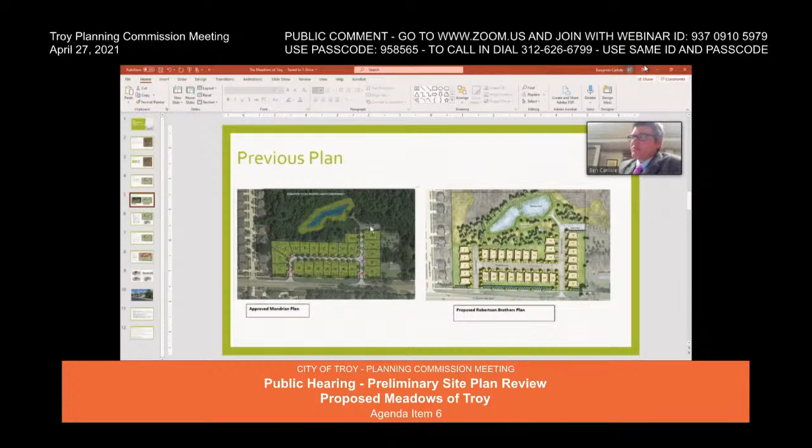We do note that the site plan complies with all the R1D setback requirements with regards to cluster, except the side yard setback deviation, and we discussed that at length at the last meeting.

Units 1 through 5 are providing a 10-foot building separation rather than the required 15 feet, seeking a 5-foot deviation. Units 6 through 12, 16 through 22, and 23 through 25 are providing an 11-foot separation, a 4-foot deviation. Units 13 through 15 and 25 through 31 are providing a 12-foot building separation rather than 15 feet.

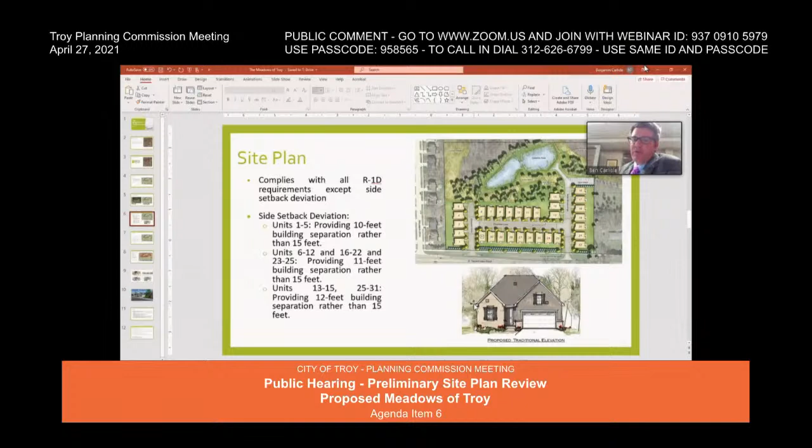In discussions with the applicant, from a staff standpoint we feel comfortable with the deviation as requested because the proposed houses are a 1-story product, as you can see by the pitch of the roof. The massing is greatly reduced as you go up in height, so the need for the 15-foot separation is relieved by the proposed product from the applicant.

We do note that the applicant is providing a proposed housing product that's desired in the community, one that Director Savidant and I push a lot when we meet with developers - a 1-story product with a first floor master bedroom and bathroom. We don't have very many of these in Troy, and this will be one of the larger developments with this type of housing product.

In addition, the applicant is constructing a 13-space gravel parking lot that'll be open to the public. There will be an easement across this road to access it, so that will be open to the public to use as a trailhead parking area.

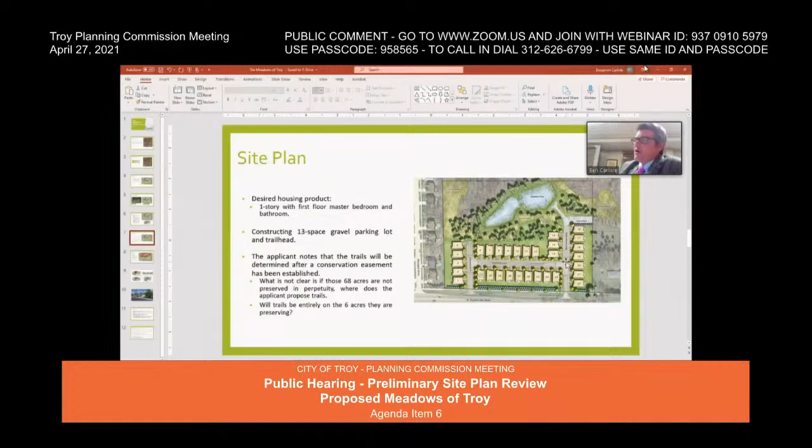The applicant notes that the trails will be determined after the actual location of the trails within the school district property is determined, based on a conservation easement that will be established. What is not clear, and something we've asked about, is regarding those 68 acres at the school district, but in conversations with the school district, their plan is to keep that area as open space in perpetuity.

With regards to open space itself, the area of open space is outlined in red. It includes 42% if you exclude the detention pond, and 52% of the total area if you include the pond. Within the open space designation, there is a wetland as well as woodlands that they are preserving.

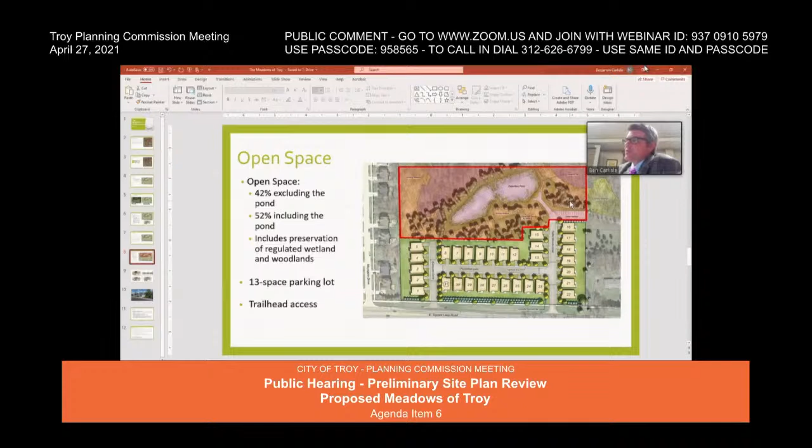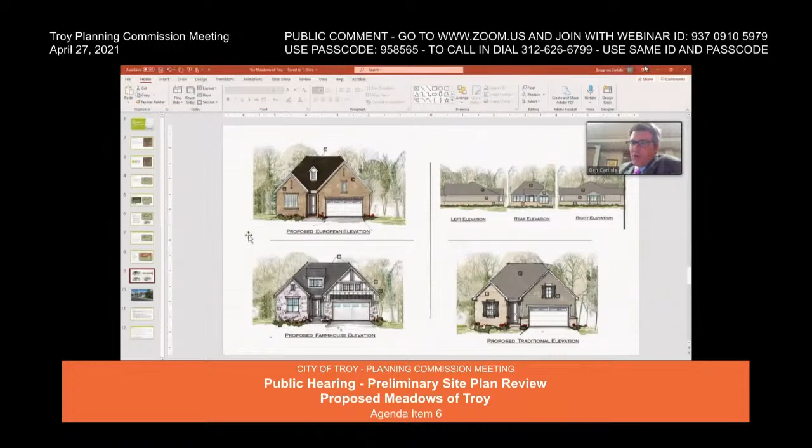Again, I noted the 13-space parking lot and the trailhead access. The product they're showing includes 3 different front elevations, and you can see the left, rear, and right elevations in the upper right-hand corner. The applicant will have to vary these housing forms as they go through the building permit review process.

So in summary, in exchange for approval to seek 6 additional units, the applicant is providing the following benefits: preserving over 30% of the site as open space, which allows for preservation of natural resources and site amenity; a private road which allows additional buffer than a public road would; an open space collar around the perimeter to adjacent properties; long-term protection and preservation of natural features; preservation of numerous trees and a regulated wetland; a site that can be adequately served by public services; a public parking lot and trailhead; and lastly, a housing product with a first floor master bedroom and bath desired by the community. We find that the site provides many benefits that would not be achievable without a cluster development.

We are recommending that the Planning Commission recommend approval of the cluster plan, provided that the applicant provide a new assessment or extension from EGLE, provide a maintenance agreement for the parking lot, and provide an easement over Turtle Woods for access to that parking lot.

So, Mr. Chair, I'm open for any questions from the Planning Commission.

Any questions for Mr. Carlisle? Go ahead, Mr. Lambert. Thank you, Mr. Chairman. Mr. Carlisle, I was wondering if you have access that you can put up on the screen to show what the alternate plan would be, if for some reason both Planning Commission and City Council were to turn down this proposed cluster plan, because I think a lot of people don't realize that if we turn it down, they could still build that property according to the original plan meeting the R1D. Yeah, I have it here, just give me one second. Sure, thank you.

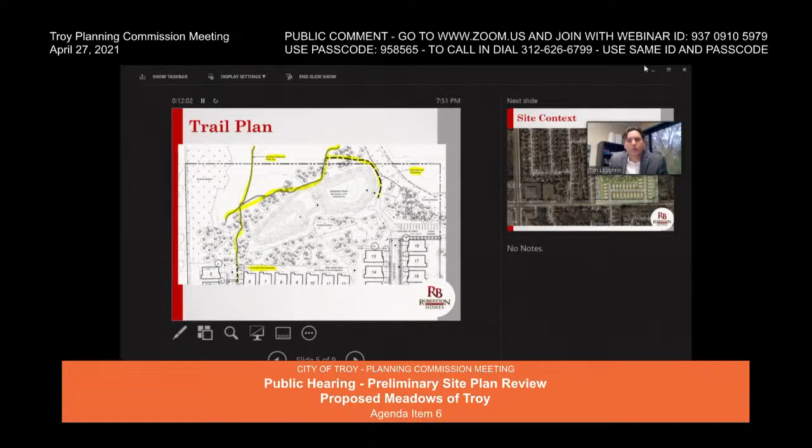Just quickly on the trail plan, there are existing trails already, and we are proposing to connect to them. This would be a new trail, and then this little connection here. We've looked at all this and feel these are the best connections, which will be for the public, particularly with this gravel trailhead.

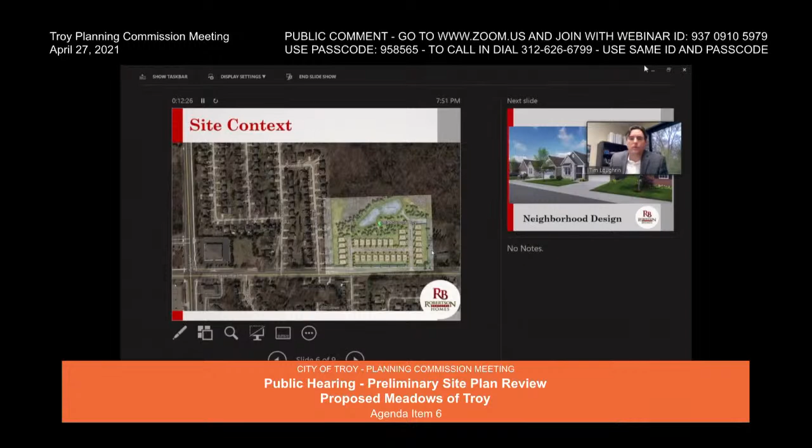From a site context, this doesn't show the entire 80 acres, but it does show what surrounds us. We have traditional single-family neighborhoods at 2 to 3 units per acre, which is what you see in the surrounding areas. This product would be very cohesive with that, and it's a great transitional use with all the open space we're providing.

I want to show this slide too, Ben did show this as well. This shows our architecture and elevations, and the typical building separation. If these were two-story homes, you'd have a much greater effect, and that 10 to 12-foot separation would feel a lot closer than it is. These are very open, ranch-style, one-story homes.

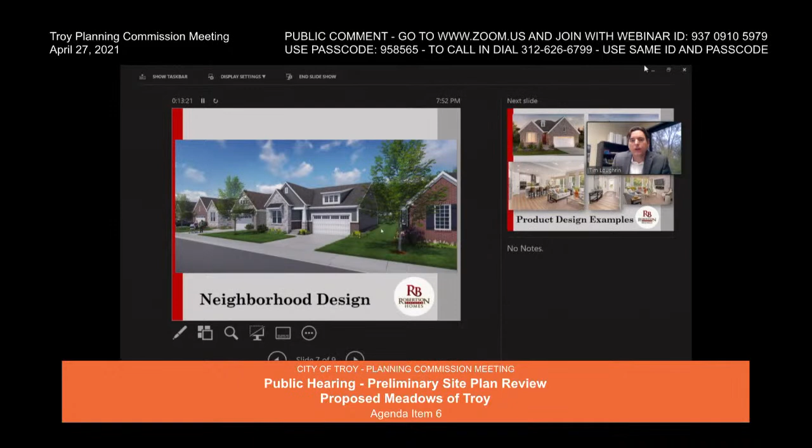This is the side of one of the units, you can see there are no windows there. The other side has a bay window for the den, so there are windows here and none there. You have zero concern with one home looking into another. That's just how these buyers prefer it.

From a product design standpoint, there are very rich details and rich materials. You can see it in person right down the street—Brewster and Walton is probably the nearest community we're building. It's brick, stone, Hardie board, very rich detail. And then the interiors, our base models are great, and we've seen a lot of people optioning these up in our design gallery in Bloomfield.

So just moving on, hopefully I've answered some of your questions. We feel this is the right use, the right place at the right time, and the right product. We hear a lot of people looking for this specific type of home, and we can provide it for them here while saving more open space than I ever have in my career. This would be a catalyst for preserving a lot of open space here.

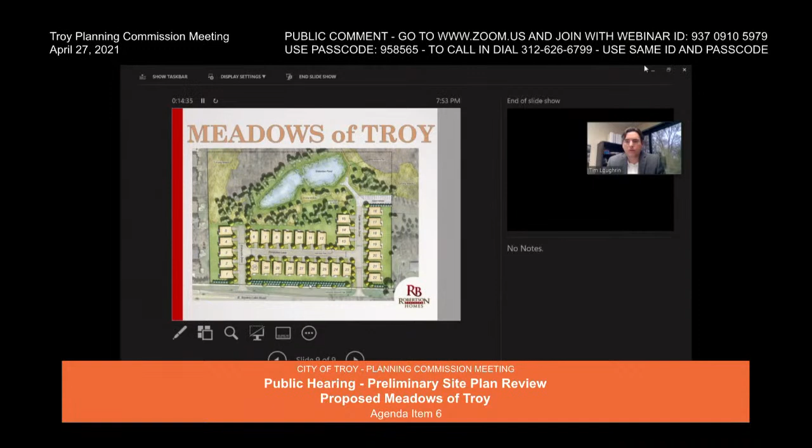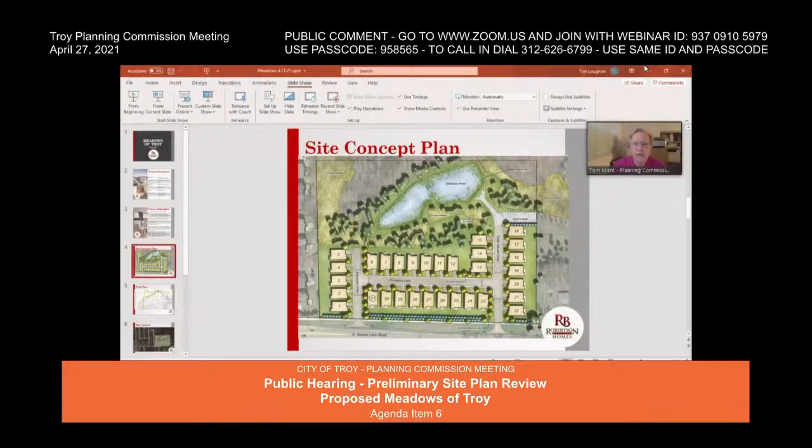I'd like to get a full screen here if possible, but we may want to leave the slides up if you have questions specific to a slide. Since I can't see everyone unless I change my view—might just be me. I don't think I can see all the commissioners and the presentation at the same time, unless we have an IT person who can explain how to do that. Good, so if you look at where you see yourself, the upper right corner, you can flip the screen if the presentation's up, so you can make one bigger than the other. There should be an option at the top near the panelists, maybe above Mr. Hutson. If you hover over it on the right side, it should say 'swap shared screen with video.'

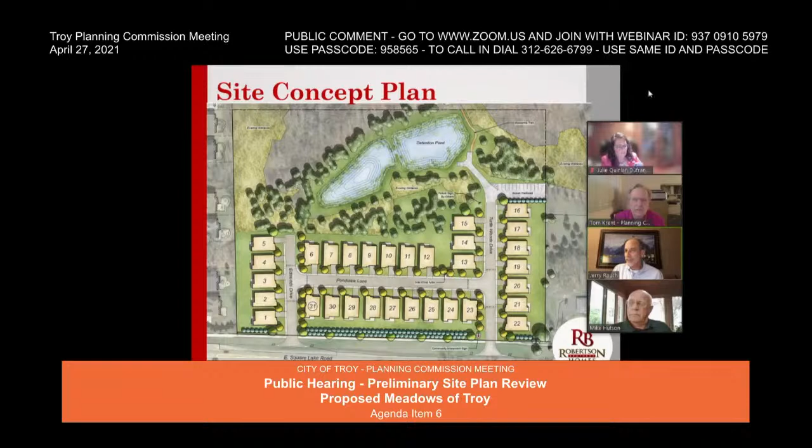Mr. Rauch: I had a question regarding the side yard setbacks of the petitioner as well. At our last meeting, you gave the example of your Rochester Hills development. I looked at the plans for that development, and the side yards on all those homes are 20 feet. That development has, by comparison, 7 acres of land being developed, while in this proposal you have about 5.7 acres being developed, leaving aside the area for trailhead and wetlands. So you could have fit many more houses in that development, or at least asked for variances to do so. Is that true? Am I reading that right?

I'd have to look at the plans, I don't know off the top of my head. From my standpoint, we did not have open space that needed to be saved there. So we looked at this site differently. This site is special because it has the open space to preserve. That other site was basically more of a box we had to work with, and a lot of it is how you fit it in — it's site planning, a whole process. But that site did not have significant natural open space to save; it didn't have really any natural open space, it was a cleared lot. So we had different existing conditions with that property.

I'll leave it at that, Mr. Chairman. I'll address mine later. Mr. Clark has his hand up.

On the Rochester Hills project, we would have asked for a 15 or 10-foot setback, but we would not have gained any more units. There wasn't a run of enough houses where changing that setback would have added or subtracted a unit — it's all about the geometry of the number of houses along a single line. We would have tried to reduce it because we knew it protected the views from the windows, but it just would not have added an additional house in Rochester had we gone to a smaller setback. That was also under a different zoning district and category, and it was not a cluster development, which encourages this type of flexibility.

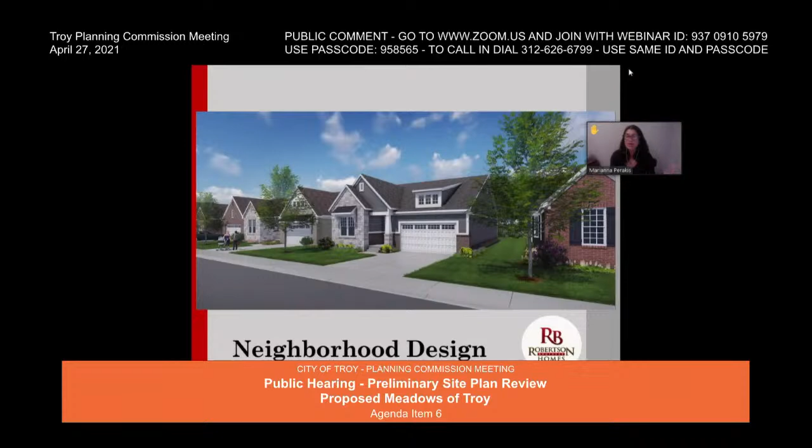On the flip side, when one of my fellow commissioners asked what happens if we don't recommend this and they use the entire 12 acres and put houses on it, I did not prefer that, of course. But I guess I'm struggling because I feel like there are ways, you said there's plenty of room, that you're leaving more open space than what's required in the cluster.

So I can't figure out why you can't just spread things out and move everything up. Why that gravel trailhead can't move a little bit up or be reconfigured in a way that allows for a little bit of widening to meet that side deviation.

You made the comment that people even prefer the aesthetic of having the houses close together, and a survey was done where people said yes, we want them 10 feet. I think it's a quality of life issue. Nobody's pretending anyone's hanging out in their side yard, but to me it's just the appearance of what it looks like.

Yeah, if I could speak to that, and Jim might be able to chime in as well. We obviously did buy for that setback, but we've been a practitioner doing this for over 75 years. We've built a lot of these type of communities. In fact, we've done more than anybody else in the entire Southeast Michigan market.

So I think it's safe to say we do know our market, we do know our buyer. We're going to invest many millions of dollars into this project. If we felt there was an issue whatsoever, we would not be showing this project. I think it speaks volumes that we are as bullish as we are on this site plan, knowing the buyer as we do, and that we will put our money where our mouth is. This is something that we feel is not an issue. We feel it creates more of a cohesive development.

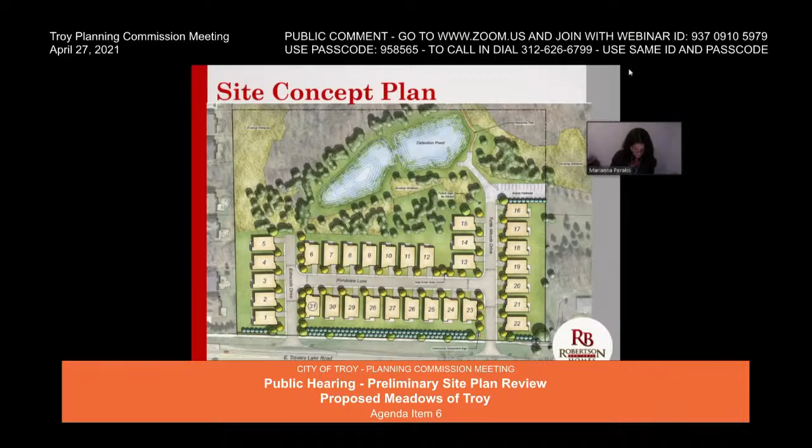I'm just going to do them in the order in which I have them here, I guess. Okay, so this was sent in from Laurie Shaw. First, I want to say that after watching the April 13th meeting on YouTube, I was very pleased with the representation of our Troy board members. Even though I didn't attend the meeting, I really appreciated all the great questions that the board members asked in regards to the Meadows of Troy development. I think they have our voices. At least I nodded my head several times and said to myself, great question. So thank you for all the great representation.

In the April 13th meeting, the Robertson Brothers representative mentioned that a homeowners association would maintain the landscaping, and I'm concerned with pesticide and herbicide usage that is commonly used throughout the lawns in Troy. Will these lawns be maintained with pesticides and herbicides? I'm concerned that pesticide and herbicide use will inevitably run off into the wetlands behind these houses and cause great harm to invertebrates, aquatic vertebrates, and other animals. From the April 13th meeting, a low point was discussed behind house number 5, which would make runoff into the undeveloped land easy to occur. Or just by using these potentially toxic substances, they can get into the soil in the undeveloped land and cause harm to the above as stated.

I've seen this happen around Troy. For example, I've seen runoff from a residence, pesticide and herbicide use on a lawn near the Sturgis Drain into a conserved wetland from the houses at the end of Tallman Drive in Troy, east of Livernois, north of Wattles. Also, pesticides are used in the lawns of homes on River Chase Drive in Troy that back up to the Rouge River. When it rains, these chemicals have to be seeping into the river. I know the state of Michigan doesn't regulate these pesticides and herbicides that lawn care companies use, but I think any use of these is a huge mistake to our environment. There has to be a better way.

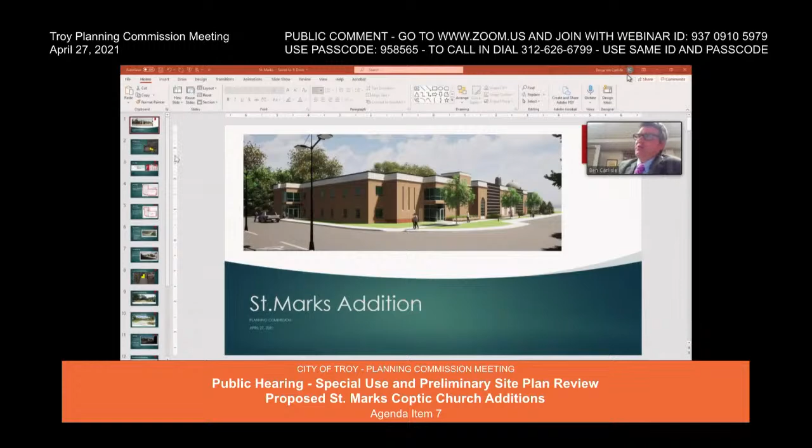Again, this is a continuation of the public hearing we had two weeks ago. The applicant is St. Mark's Church, located on the west side of Livernois, just north of Big Beaver. The addition is to an existing church at the back of the existing site, located at 3603 Livernois Road. It's zoned R1B, and the proposed addition is a place of worship, which does require a special use permit.

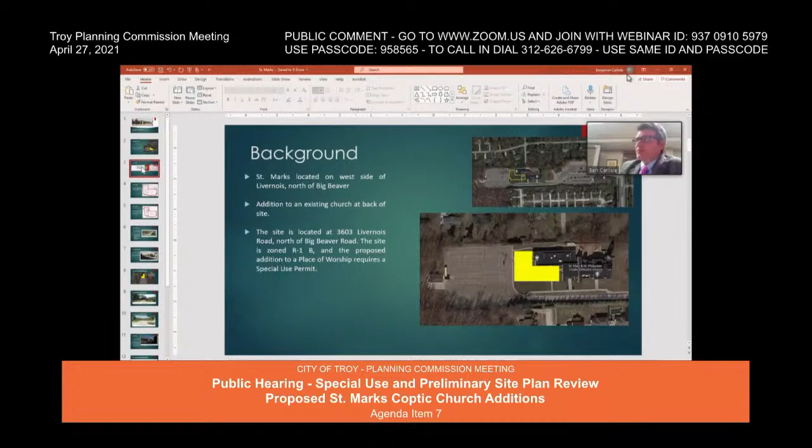The site plan is in front of you. It's a little hard to read on the screen, but the existing worship center or church is outlined in green, and the proposed addition is outlined in red. The proposed addition is a 2-story addition that includes a basketball facility as well as classrooms for Sunday school, and it complies with all the R1B zoning requirements.

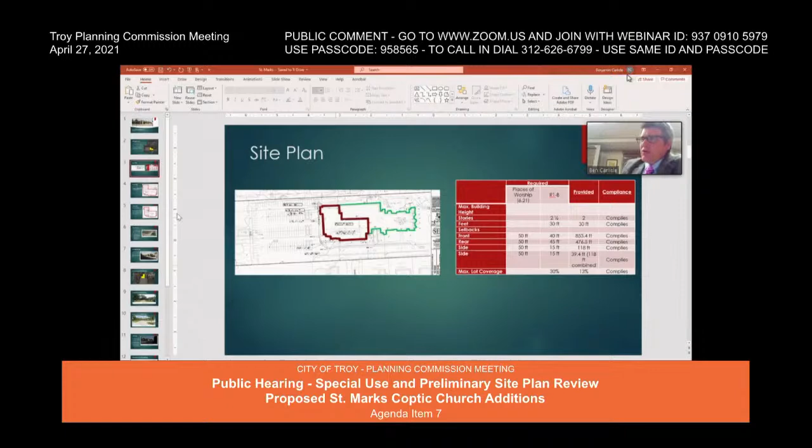The floor plan is shown in front of you. It's a 2-story addition. The first floor includes a basketball facility, 7 classrooms, a kitchen, and bleachers as part of the basketball facility. The second story includes 5 classrooms, a multi-purpose room, 2 offices, men's and women's restrooms, and a storage room. The basketball facility is 2 stories, so half of the second story is open-ended for the basketball court.

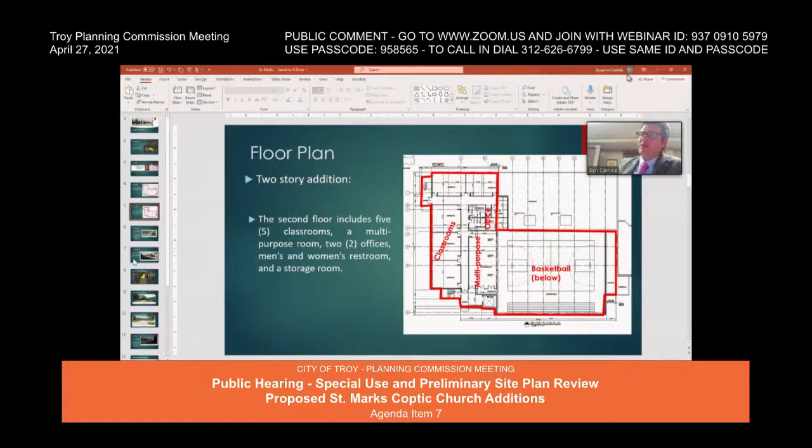In relation to the operation of the site, we did get confirmation from the applicant that the use of the basketball court would not occur at the same time as the use of the place of worship for mass. This is mostly for parking considerations, and they noted that they will not use the facilities concurrently.

In addition, we wanted to ensure the new space's times of operation, specifically with regards to noise as well as lighting upon adjacent properties. We had a lengthy discussion about that at the last planning commission meeting; they were not proposing to go late into the evening, and lighting was subdued and screened by adjacent landscaping.

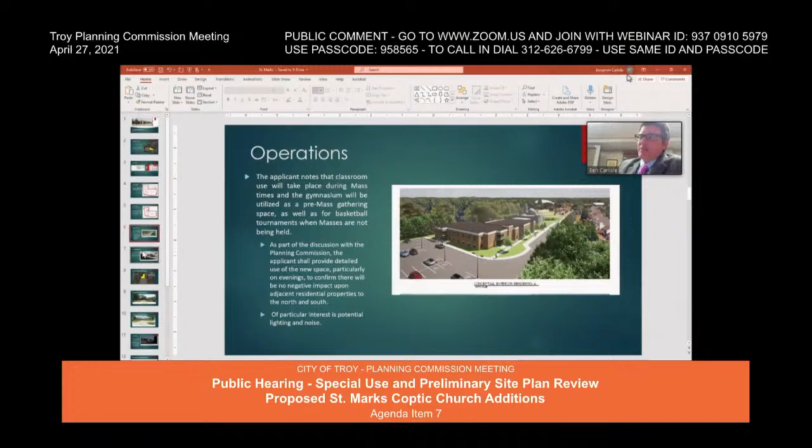The applicant has not submitted a detailed landscape plan, but according to the renderings, there is building landscaping proposed, so we are asking for a detailed landscape plan as part of the final site plan submittal.

We spent a lot of time discussing with the applicant buffering and screening. This is looking at the site from the parking lot, looking east to the facility. The facility is basically proposed as the block shown here in yellow. You'll note there's significant screening both along the northern and southern property lines that really screen this building from those adjacent properties.

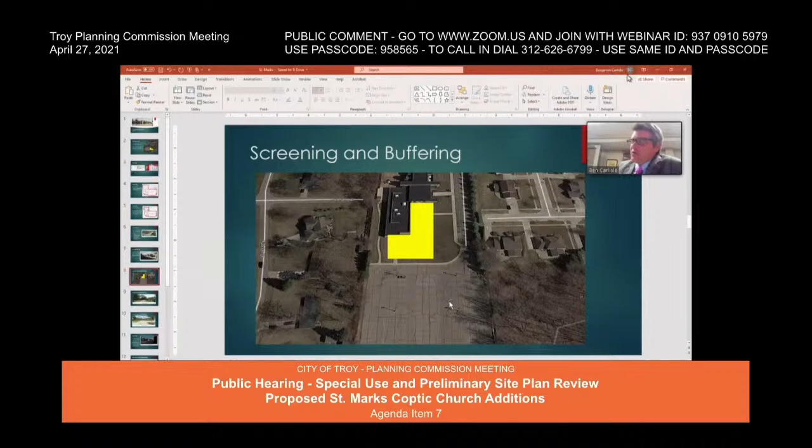With regards to lighting, the applicant is proposing 2 different lamp types, both with 2 different fixtures. Both are downward directed and meet the zoning ordinance requirements. It appears the applicant designed the building so that the highest windows are approximately 20 feet above grade, and those would be screened by the adjacent mature landscaping shown previously.

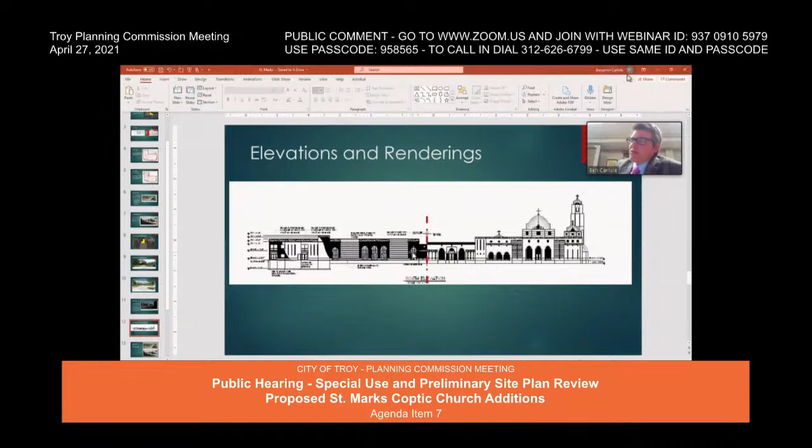This is a rendering or elevation of the building, the long side along the south elevation. The new portion of the building is on the left side of my dashed red line, and the existing facility is on the right-hand side. The applicant has tried to match architectural style consistently as well as materials.

These are some conceptual renderings. This is looking downward at the site, looking to the east. The existing facility is in the back here, kind of grayed out. The new facility is in this tannish brown brick color.

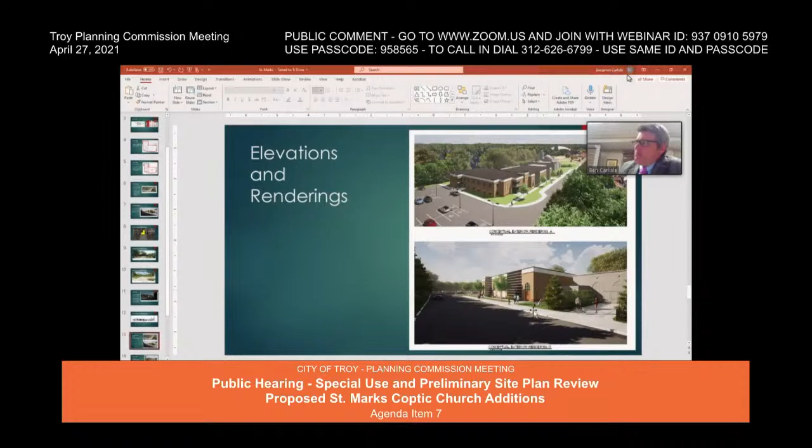This is a street level view of the elevation looking back from the site into the parking lot. This is another view of looking at the addition from the parking lot itself. And this is the rendering at night.

There are standards that the Planning Commission is to consider with regards to this facility. The applicant can explain the use of the building, particularly on evenings, won't impact adjacent properties to the north and south. We do feel it meets all the special use requirements. The primary use of the building on site continues and will remain a place of worship. There's an existing dense screening to the south and north that should screen the proposed addition.

With limitations, the co-occupancy of the main sanctuary and the new accessory facility - the new accessory should not impact existing traffic to the site out of normal operations. The addition to the existing building will not impact public services, and the accessory building does not impact the overall environment.

That being said, we are recommending the Planning Commission approve the project with the conditions that the applicant agrees there will be no concurrent use of the facilities. And lastly, the applicant provides a detailed landscape plan as part of the final site plan. Thank you.

Okay, any questions or comments for Mr. Carlisle?

Okay, we'd like the next person to speak, the applicant, to hear any further information that we maybe haven't heard from Mr. Carlisle, or other things you may want to add.

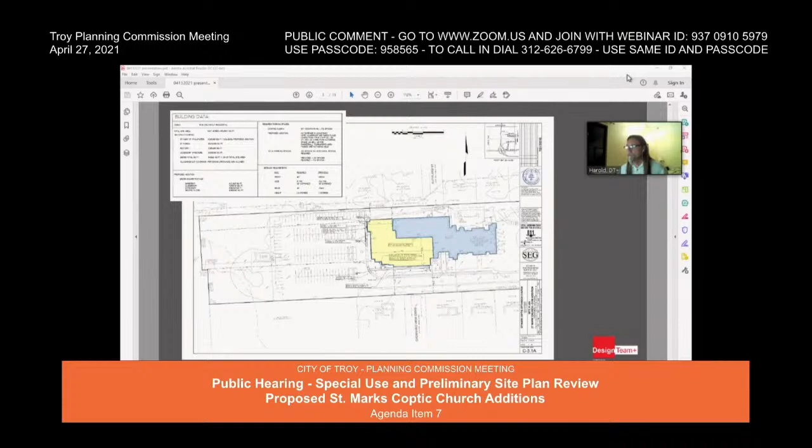Height-wise, our proposed addition is going to be approximately 26 feet above finished grade. The existing daycare, to the north along the north property line, is currently 15 feet 4 inches, and along the south side of that building, it's 19 foot. So we're only looking at an increase of approximately 7 feet in height, give or take.

The existing sanctuary main portion of the building is 28 foot above finished grade. The dome and tower at the east end of the building is 76 feet tall. So we are substantially lower than what the actual existing church sanctuary is currently.

From the property lines, our north side of the building is currently 39.4 feet off the property line. From the south property line, we are 83.8 feet. We meet all the requirements for setback. I do want to point out there are no windows along the north side of the gymnasium facing the properties to the north. We do have some classroom windows on the first and second floor, a total of 4 on the second floor and 4 on the first floor.

As mentioned by Mr. Carlisle, these classrooms are being used for Sunday school in conjunction with the celebration and mass taking place within the sanctuary. The gym is not going to be used at the same time the sanctuary is being used, for any type of tournaments or games. However, during times of worship, mass, in the sanctuary, this will be used for pre and post functions for gathering of the congregation. They currently have a very small fellowship hall that cannot accommodate the size of their congregation, so this will actually aid to that.

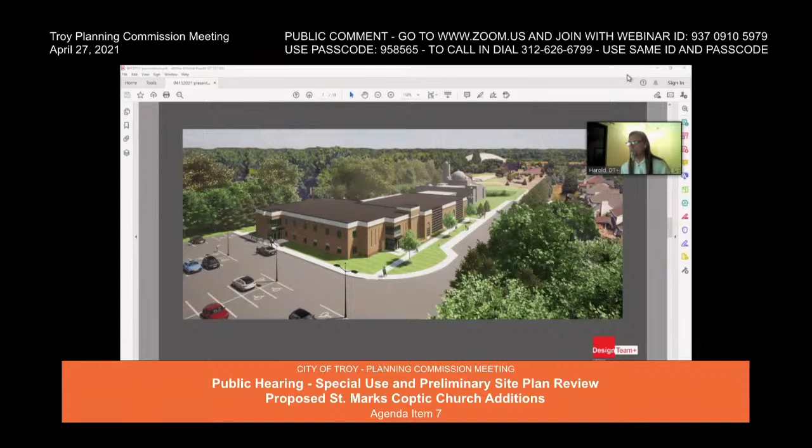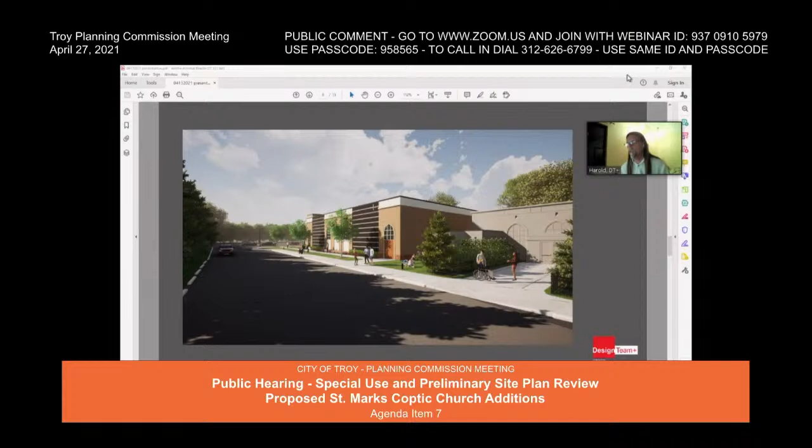We also have a rust colored foundation brick creating a perimeter along the south side as well as the east, but we will terminate it coming along towards the west side facing the parking lot. We will also be incorporating a metal insulated panel with stainless steel accents, which will pick up on the details currently on the patinated copper domes on the existing sanctuary today.

We did have some conversations in our last presentation regarding sound and noise transmission. As mentioned then, we are looking at using a precast insulated concrete wall panel system for the project, which has a sound transmission class of 60. What does that mean? If you look at classroom design for schools, any classrooms adjacent to a gymnasium, auditorium, or swimming pool are required to have a sound transmission class of 60 for that wall assembly. Basically, that will mitigate any sound transfer that would disrupt the classroom adjacent to it.

I just want to point out again, we are almost 40 feet off the property line to the north and over 80 feet off the property line to the south. Any noise that may come through the walls or the glass will be diminished greatly by the time it reaches the neighboring properties.

Our windows, again with sound in mind, we are looking at using insulated, laminated glass glazing. It'll reduce noise, but also serve as a safety feature for the gym when a game is happening, so in case a ball bounces off of it, we don't have to worry about any breakage.

We also looked at safety of the occupants by placing a railing system along the sidewalk at the parking lot. Again, no doors lead directly into the parking lot. It's a 90-degree turn, and then they have to filter either way past this railing, giving them ample time to watch as cars are approaching or leaving the parking lot.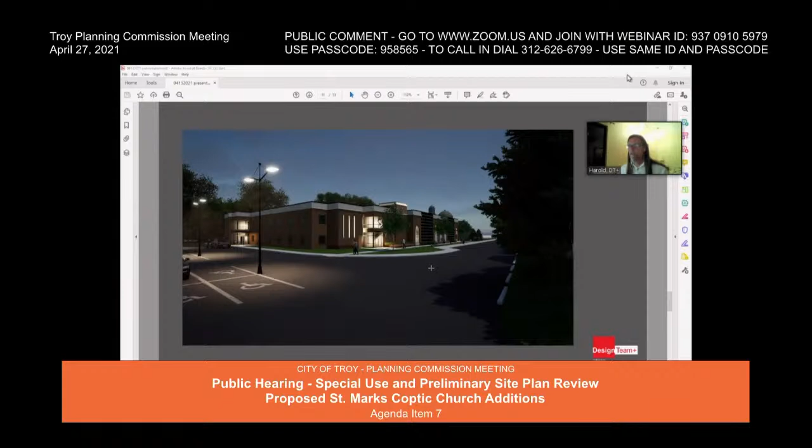We did do a night shot, shown in Ben's presentation, showing the lighting coming through the windows. Very minimal areas where that is happening, and more than likely the classroom building that's not being utilized during the time of a game would not have those lights on at that portion of time.

The actual gymnasium itself is approximately over 95 feet away from the north property line because it is on the opposite side of the existing daycare that is there.

I do know there were some questions and comments brought up regarding stormwater detention and retention. When the site was originally designed, it was intended for this addition to be placed in the future, so the stormwater system has been designed accordingly to accommodate the additional runoff from the roof surface being placed here with the addition.

At that point, I will open this up for any comments or questions that you may have for me.

Thank you for that presentation. Any questions or comments for the presenter? Ms. Malalahalli. You're muted—she'll get there. There you go. Sorry, my apologies.

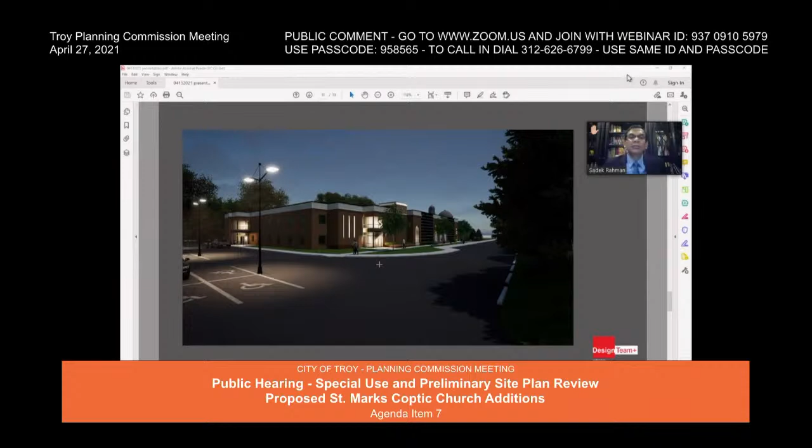Along the north property line, there's no windows facing north on the basketball court. The view that we are seeing right now, is it the south side? Correct, yes. Do you have any view on the north side in this presentation? This is your view from the north side. The only windows here are the 2 classrooms up and 2 classrooms down, which again are only going to be utilized during the times of the sanctuary, mostly during the day for their services. So where is the basketball court?

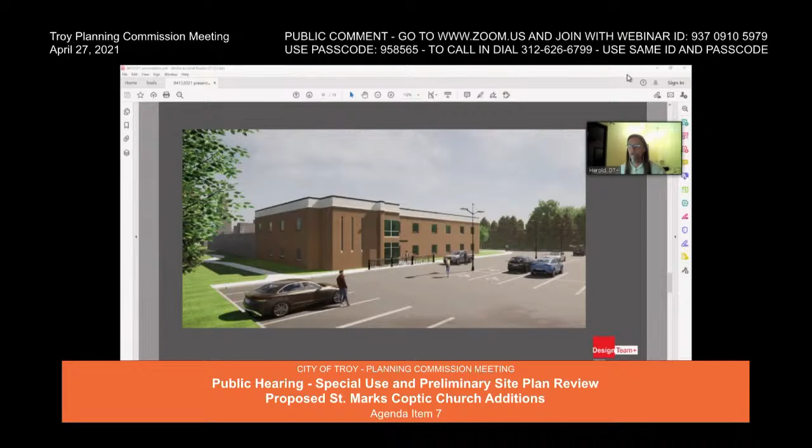It's inside. You can't see it from this side because it's stepped back over 25 feet from this wall inbound. If we look at it from here, here is the existing north wall. The blue is the existing 1-story daycare area. The gymnasium is tucked in over here in back. The reason for putting it in this location versus that location was taking into consideration the adjacency to the neighbors to the north, since that property line is only 39.4 feet versus the 83 and some change of setback on the south side.

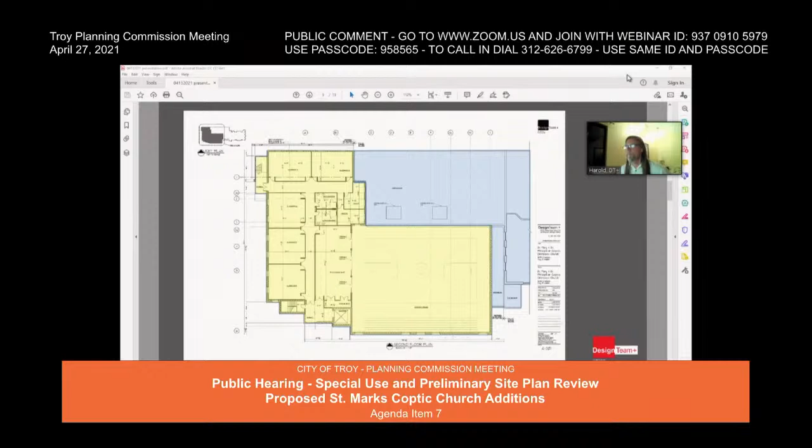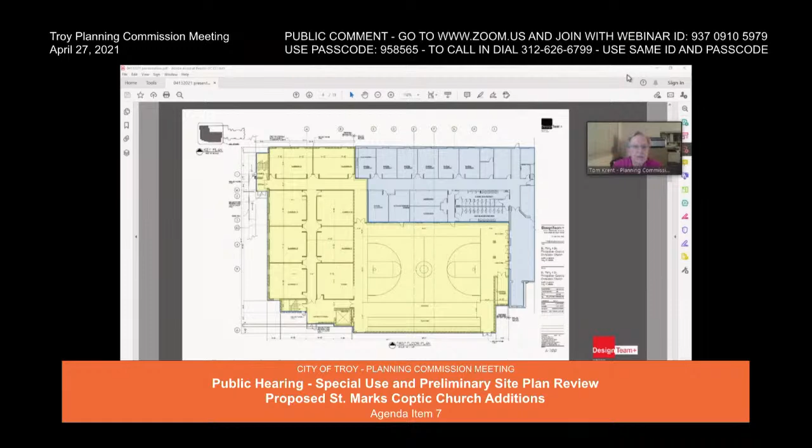Okay, thank you. You're welcome. Any other comments or questions? I don't see any. If you don't raise your hand, just shout out. I can't, I don't see anyone else. All right, thank you for that presentation. Let's bring it back to the commission for discussion and resolution. And you just, yeah, raise your hand. There you go, Mr. Faison got his hand up first.

Thanks. Just a question on the landscaping and the screening. This is, I think, for staff, for Ben and maybe Brent. There were some comments we got in the emails about the lack of screening in certain areas, which seemed inconsistent with some of the views that were shown. Is the church in compliance with their current landscape plan?

Mr. Faison, in my opinion, yes, they're current with the required landscaping. They're adding landscaping where they need to. In addition, there's that dense screening now. That being said, because this is a special use, if the Planning Commission feels there's not sufficient screening in a particular area, they can require screening in order to comply with the standards of the special use. That said, I haven't heard anything about any specific single area that needs additional landscaping, but if the Planning Commission has a point where they'd like additional landscaping, we can discuss that. And from discussions with the applicant, I don't think they would have any concern about adding some additional landscaping if need be as part of the project.

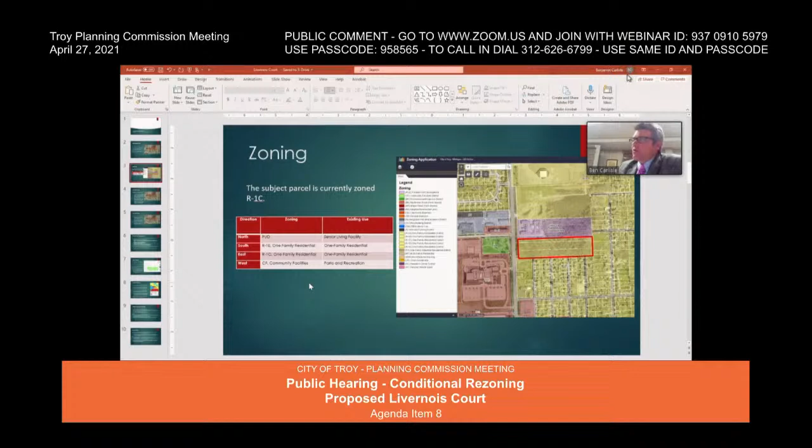With regards to zoning, the zoning in the area is kind of a mixed bag. To the north is a PUD, the senior living facility I noted. To the south and east are both R1E and R1C, one family residential. To the west is community facility, parks and recreation. Part of it to the southeast corner is Big Beaver zoning, and the southwest and northwest corners are also Big Beaver zoning districts.

In their conditions, as part of the conditional rezoning, they've offered 3 conditions. The first is that development occur only in areas outside of the 100-year floodplain and wetland delineation, with those areas to be treated as conservation and not developed under the proposed rezoning request. Number 2, the proposed parcels will provide a 40-foot easement to the parcel to the north in case of future development, to satisfy egress guidelines for such development. I'll have more discussion on each of these in a second.

And the third is the development will include only attached multifamily buildings. Such buildings shall not exceed 35 feet in height, and shall have a minimum setback of 35 feet to R-1C parcels.

A couple of questions I have on the conditions the applicant offered: first, what does 'development' mean? Does it include site grading within that 100-year floodplain and wetland? And how does the applicant plan on preserving that area - will it be through a land conservation easement, a land donation, or some other means? How are we going to preserve that area in perpetuity is basically my question.

Thirdly, the applicant has actually included 3 parcels, and I'll show you the site plan in a second. But one of their conditions is that if the parcel to the north needs an easement for access - if that parcel is already included in the rezoning request, I don't think this condition of an easement is necessary as part of their conditions.

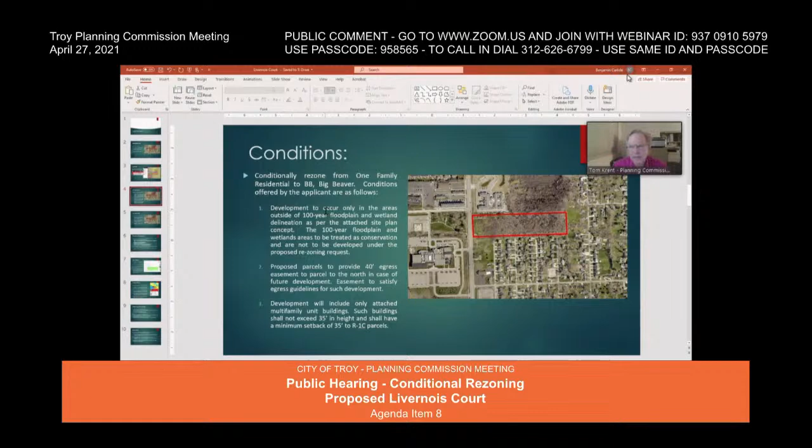Yes, I have a question for Ms. Dufrane. Do you see this, from a legal standpoint, as a viable approach, given that we're really talking about two property owners? I guess I've never come across anything like this. It's like we have one property owner asking for conditional rezoning not only for his property, but for property he doesn't control. Mr. Tagle, you raised the same concerns I raised with Mr. Savidant regarding this. It's my understanding, and Mr. Savidant, jump in if I'm incorrect, that the city is treating the application as for one parcel, and Mr. Black submitted a notarized letter saying he agrees with that. So we're treating Mr. Black as a co-applicant on the rezoning. The question I'm having as we sit here listening is essentially Mr. Black's property won't have any conditions placed on it. It will only be rezoned to BB, while Mr. Nikolai's properties will have the conditions he's offered, because he can't offer conditions on property he doesn't own, and Mr. Black, as co-applicant, isn't really offering any conditions as far as I'm seeing. So yes, Mr. Tagle, this is very unusual. That's the best answer I can give you right now.